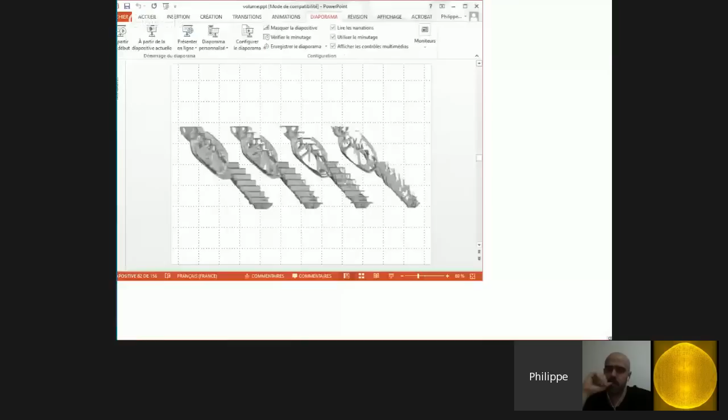Actually, there is a little problem. Sorry, the first screen doesn't work apparently. Sorry, just a small technical issue. Okay, do you see this screen now, because it seems the one before didn't work? Does that one work? It's okay now, Philippe, it's okay.

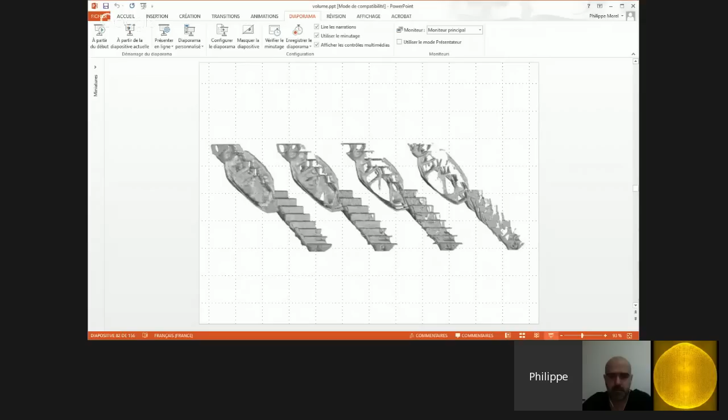It's better? Yeah, we can see the picture of the stairs. So this is a stair produced by topological optimization software by Romain Duballet, who is an engineer who graduated from the École des Ponts. He's also a shareholder and a partner in XtreeE, and is now...

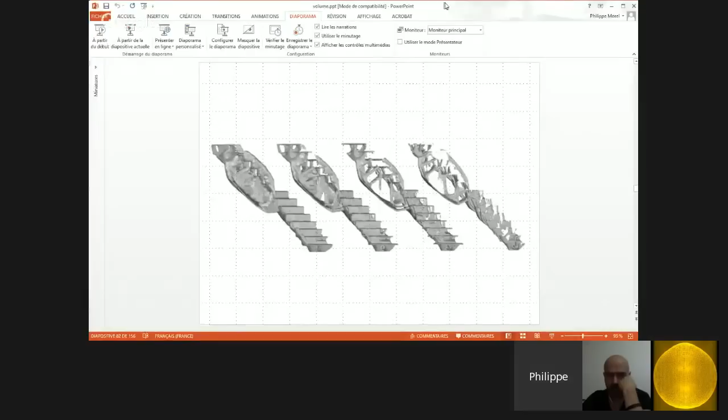I'm sorry, but the problem is you can't use full screen. Okay, just have to, yeah. So I have to stay... Yeah, you have to, I can't use the full screen. Don't worry, okay, it's fine, no problem.

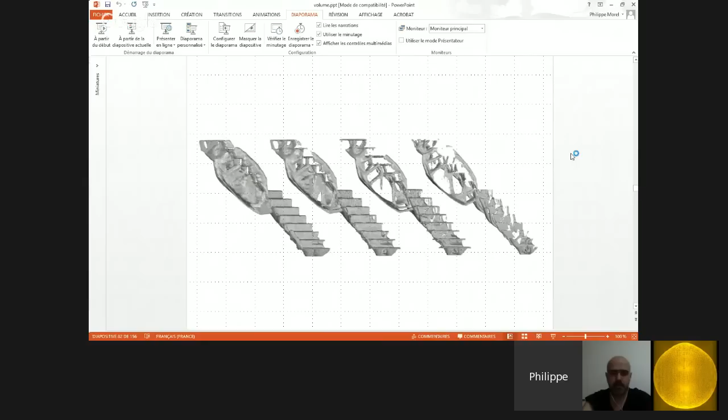This stair produced by Romain, who is also part of XtreeE, is on the engineering side, and is also, by the way, a PhD candidate now at the École des Ponts. As you can see, it creates quite complex shapes. Here are a couple of images of mechanical analysis of this element.

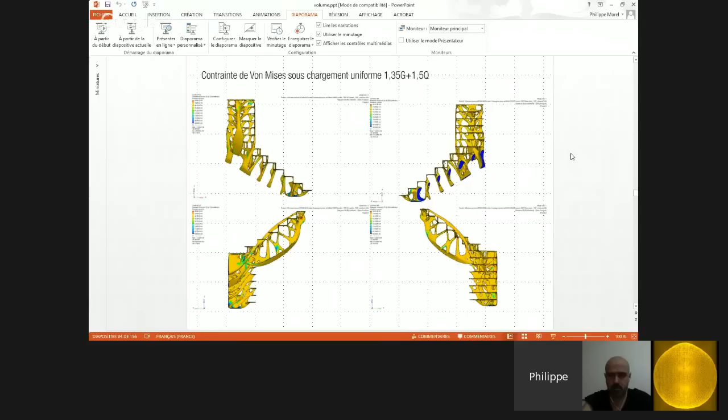But the problem you have is first that the geometry is very dirty, and here I would refer to my friend Peter Macapia, who wrote a very beautiful essay entitled Dirty Geometry, published a couple of years ago. I think it's a very amazing essay in architectural theory.

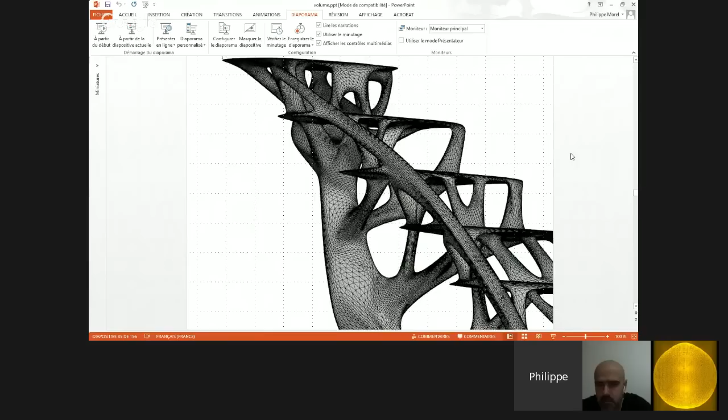First you have to clean up the geometry. The more automated it is, the better, because it takes a long time, and it's a very boring job to do all of this by hand, obviously.

Here is another approach to topological optimization, which is not done by a commercial software, but by a fully programmed algorithm, also programmed by Romain Duballet. He wrote the entire mechanical analysis library, and also the genetic algorithm itself. The whole thing was written in Mathematica.

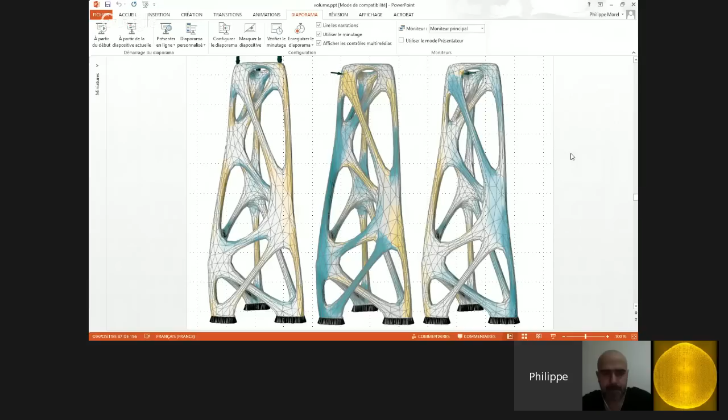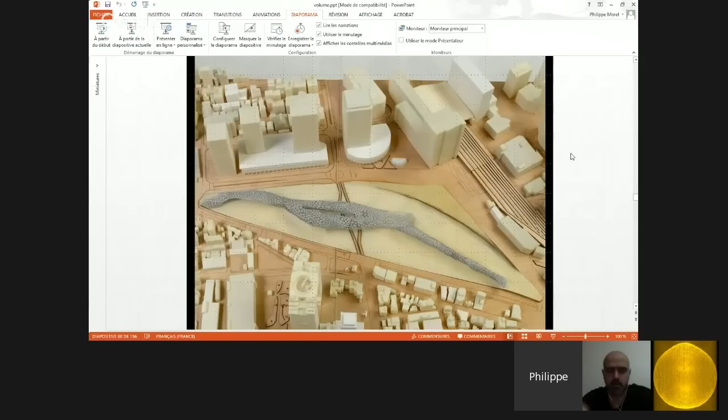I will show you a small piece of that made by our company. Here is a project we made in Japan, a competition we were shortlisted for last year. It was in Osaka, a very nice site, and we proposed a gigantically long building, some sort of a mega structure, more than 1 kilometer long. It was 1.2 kilometers.

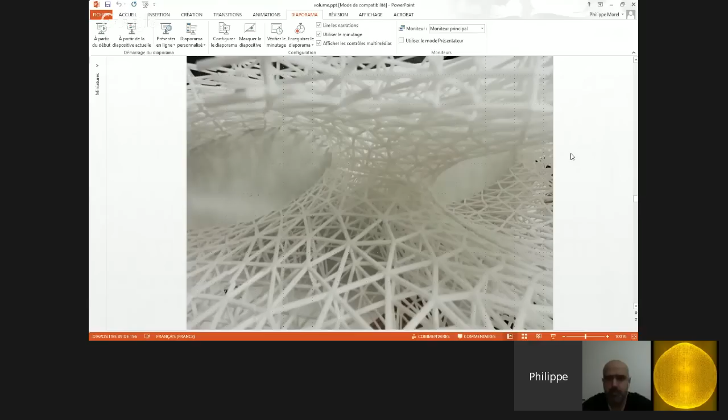It was a super long building, completely made of a space frame, or space truss, or 3D lattice element. We believe this is quite interesting, but it really creates new problems in architecture. If we want to do that in steel, it's not that difficult - we have the technique now to do this in steel.

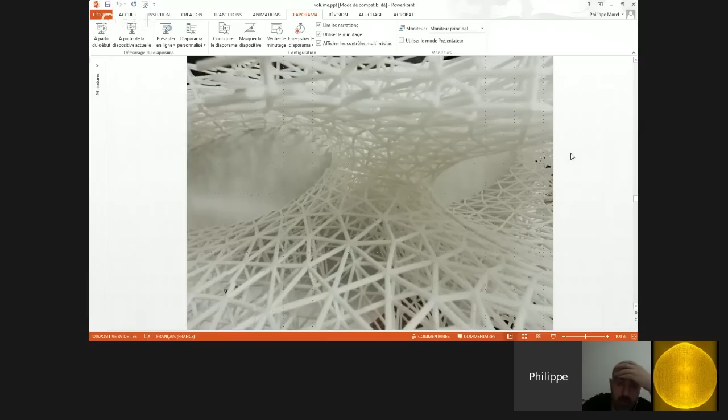But if you want to do this in a continuous way, the way you would do it in small-scale 3D printing, small-scale additive manufacturing, then it becomes a crazy challenge. So I really believe the real challenge at the moment in architecture is to make the intrinsic geometrical and topological complexity associated with topological optimizations buildable.

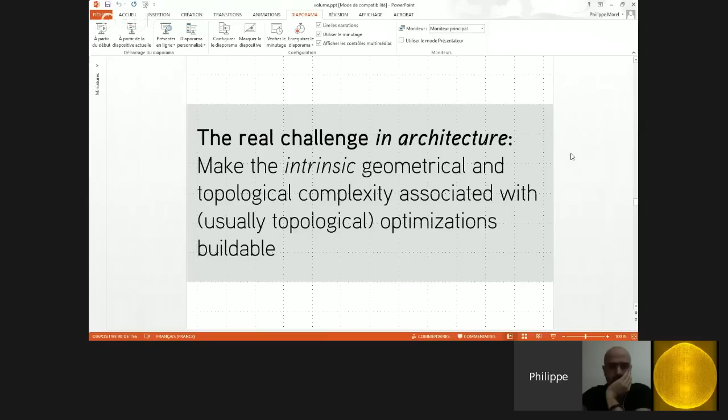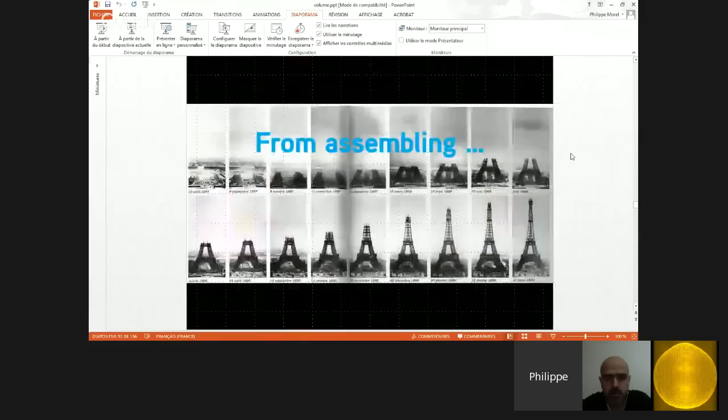It's a fact that 3D printing has the potential to revolutionize the way we make almost everything. This was even said by President Obama two years ago. And we go from assembling to printing, etc. But at the small scale, it's fine, actually.

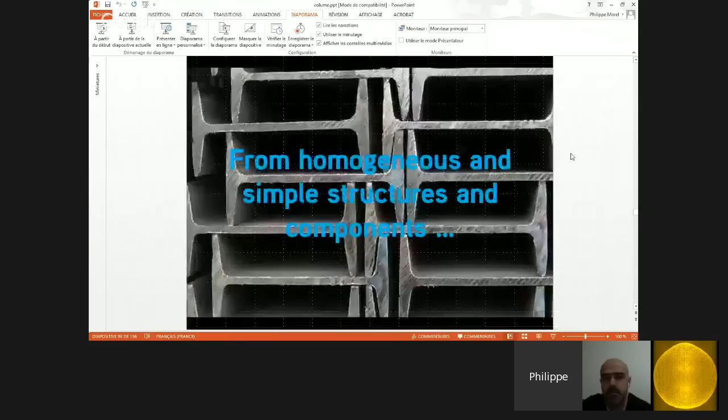These are works done by my office, with Felix. And we also move from homogeneous and simple structures and components to heterogeneous and smart design. This is work done by Minsu Kim, a student of mine when I was leading a research studio at the UCL Bartlett with Thibault Schwartz, two years ago.

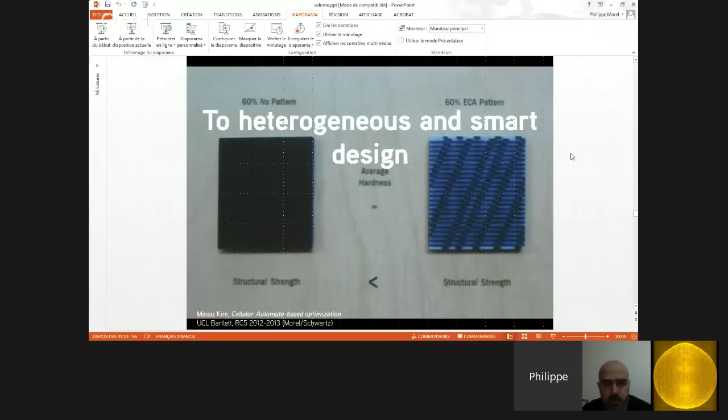These also are old projects from my office, but let's move a bit fast. This is just to give you an idea of where this interest in three-dimensional lattice comes from. In fact, it does not come from an interest in space truss or space frame - on the contrary, it comes from a long-standing interest in voxelized geometry.

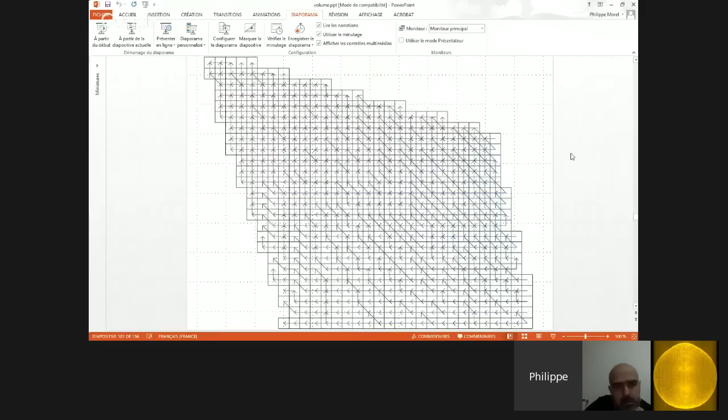As you can see in these images, the principle is quite simple. We were thinking about a way to use voxels as individual cells and to create connectivity rules in order to create cavities inside these cells - hollow cells in order to pour self-placing concrete in those cells.

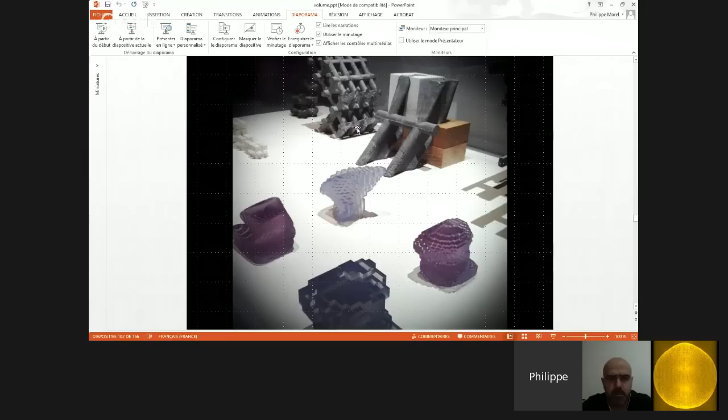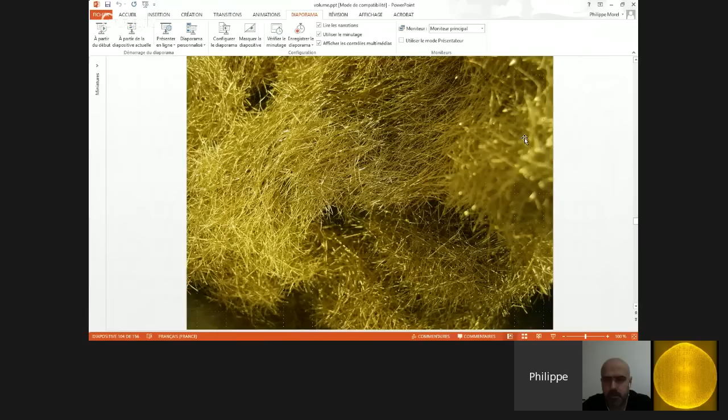If you look at the top here, you clearly see a small piece of concrete which is really three-dimensional, the result of concrete which was poured. It's a fiber reinforced concrete, poured thanks to the help of Lafarge-Holcim, the famous cement manufacturer.

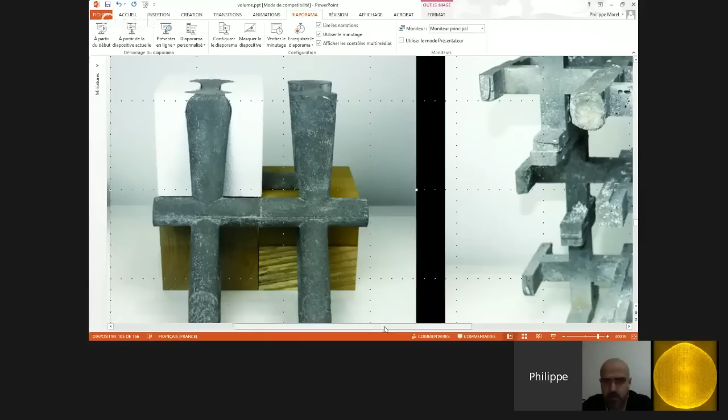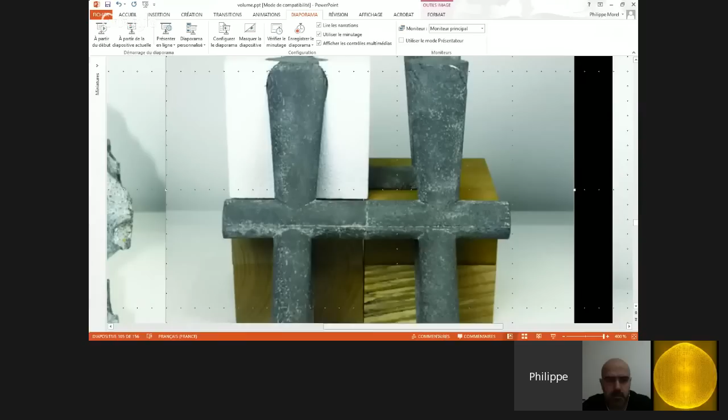Which was poured in these cells. So it's not that beautiful, but conceptually speaking, the interest we have now - and I personally have - in a three-dimensional lattice does not come from classical three-dimensional lattices. It really comes from an interest in voxelized geometry.

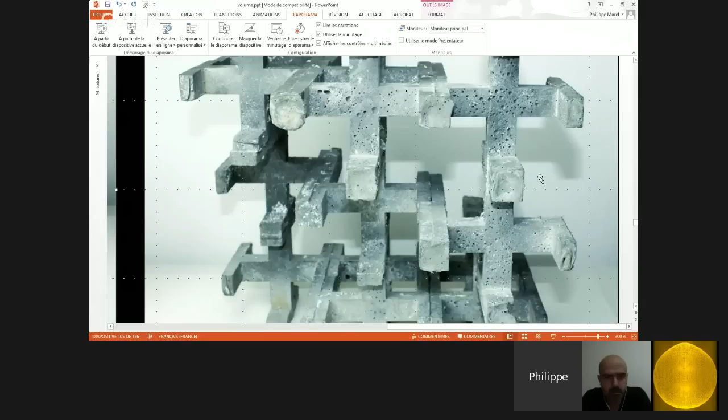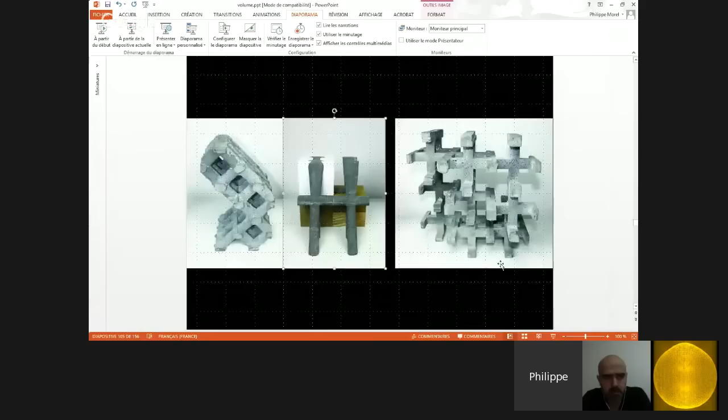I mean, defining connectivity rules between voxels. And if you have pipes which are continuous between different voxels, then you can pour some concrete in, and you can obtain this really amazing three-dimensional concrete component. You can see here something more complex, which we realized at that time with my former interns, Tristan Gobin and Thibault Schwartz, at the office.

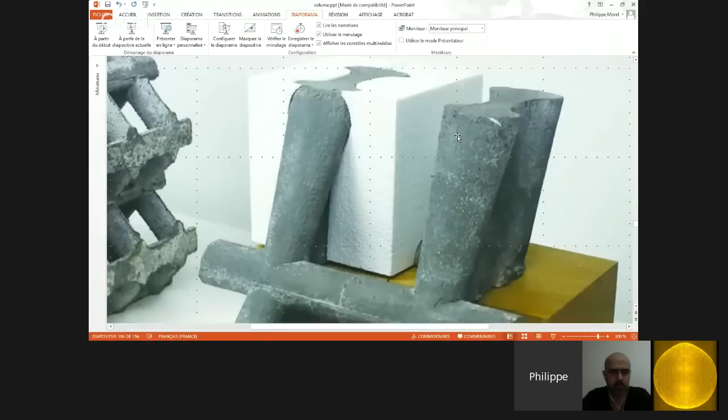With the help of other interns and very talented students, you see here a polystyrene block, which is a voxel. You see the way it's cut, and when you remove this block, you see the kind of geometry you can obtain.

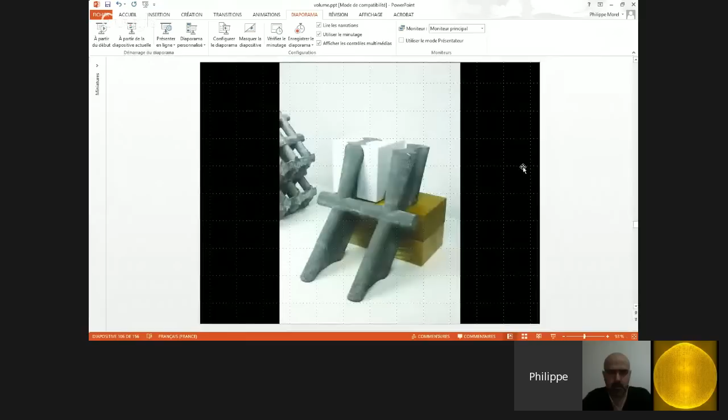I'll go fast with these images, but there are two concepts which are at the root of what we are doing at the moment, and also what I'm trying to do myself with the X3 company. X3 is dedicated to the large-scale 3D printing market, and it's not only about my own specific interest in this kind of geometry, but it answers more global demands coming from various clients.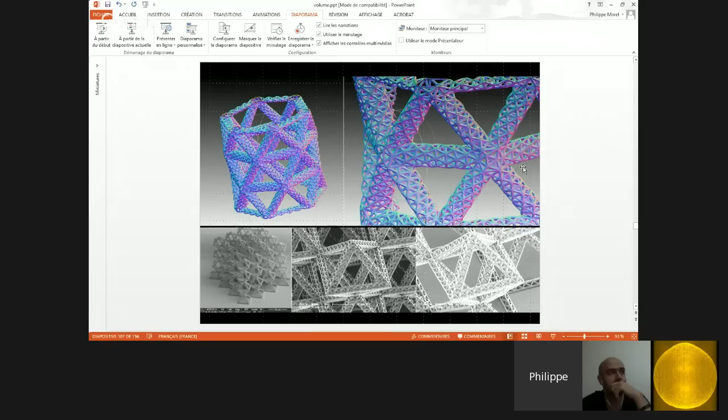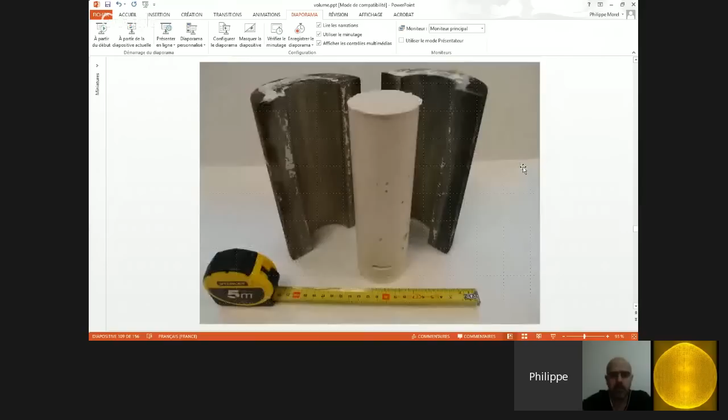We produce many different kinds of products and geometries. You see here the concept of recursivity, which is absolutely crucial. You also see a very old experiment with space frame here.

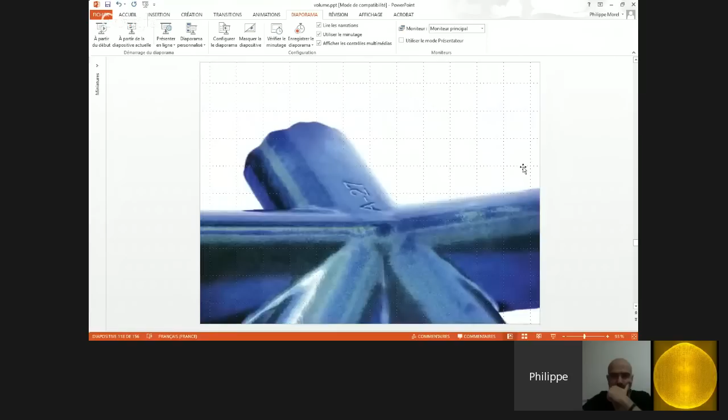This was done with the help of Justin Dirrenberger, associate professor at CNAM and researcher in the PIMM laboratory at ENSAM. At that time it's already two years old. This is research we presented at ArchiLab.

We used voxel jet technology in order to cast concrete in. You see that we obtain quite high quality results with the cement. We are very proud that this piece was presented at the Centre Pompidou.

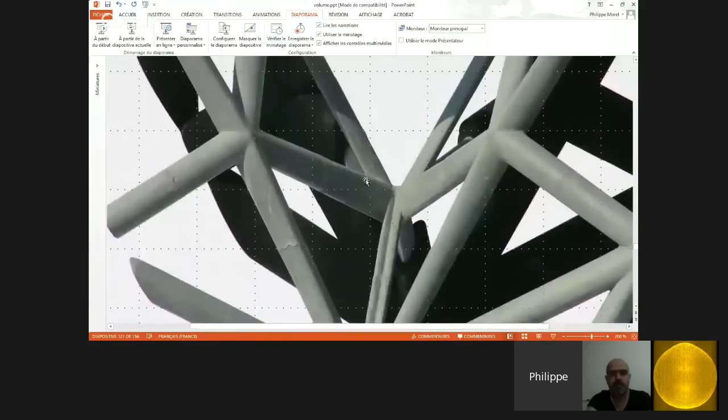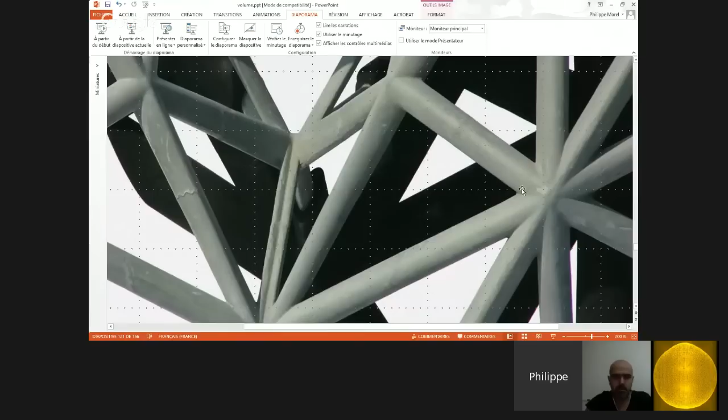It was first presented at the FRAC in the framework of ArchiLab, but also later at the Centre Pompidou, which made it available to a wider audience, and really to a non-specialized audience, which I believe is super important.

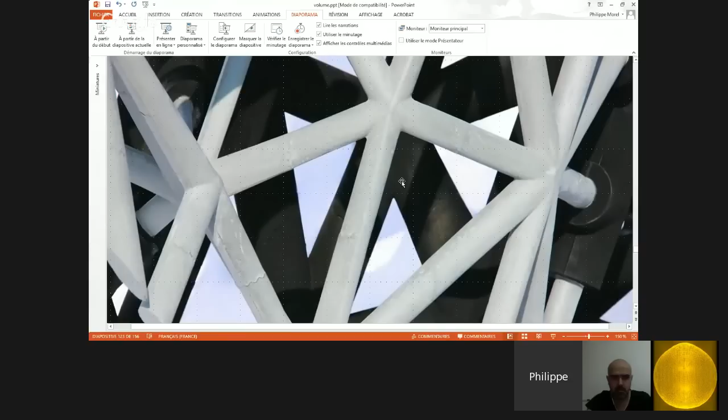You see this kind of very light, extra light concrete lattice. It's probably the very first extra light concrete lattice. The wall element is quite big, about 1.85 meters in diagonal, 65 centimeters deep, and approximately 1.20 meter high. There's only 34 liters of concrete in these structures, which makes it super light.

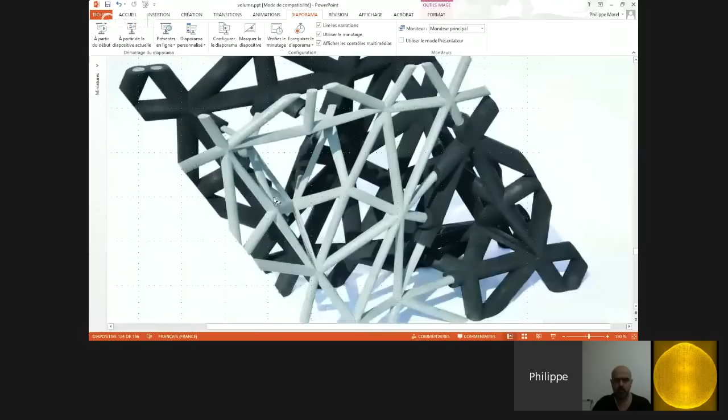Basically it's about 120 kilos. And as you can see, you can obtain extremely beautiful shapes and profiles with this.

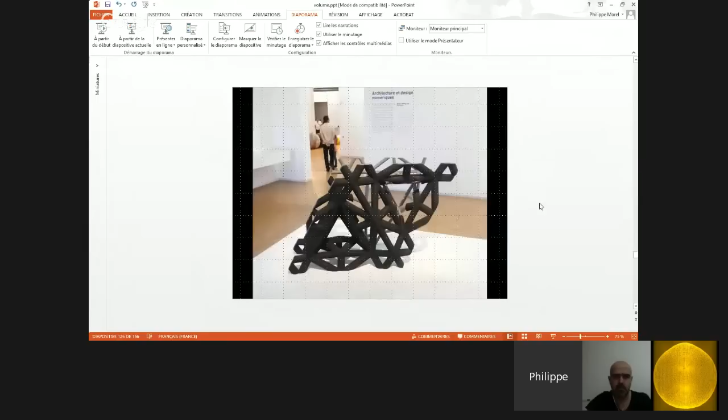So what we are trying to do now with the new company we are creating is to develop this kind of work one step further. I'll pass on to alternative ways of doing this kind of lattices.

This was also done at UCL Bartlett by some of our students with Thibault. And this was done last year by Clément Gosselin, who graduated with me. I was his director of studies.

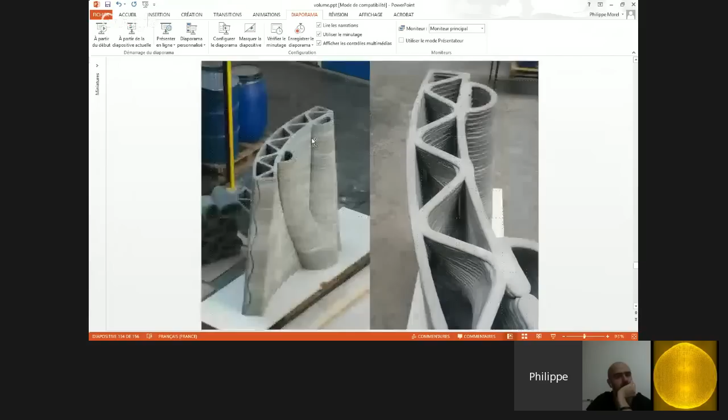I mean his main supervisor. The second supervisor was Jean-Aimé Shu, who is also an architect and engineer, working at Paris-Malaquais, at the École Nationale Supérieure d'Architecture Paris-Malaquais.

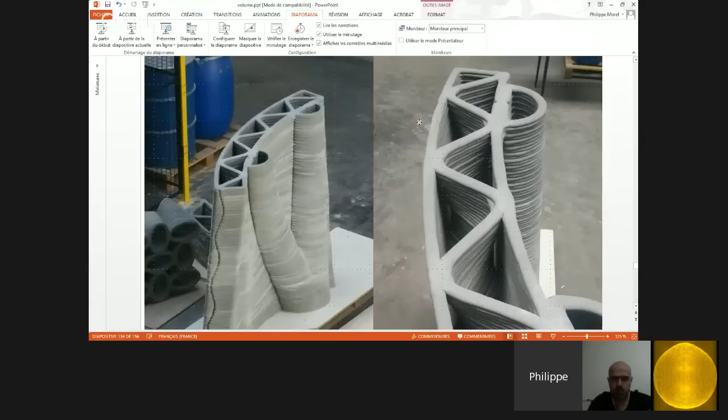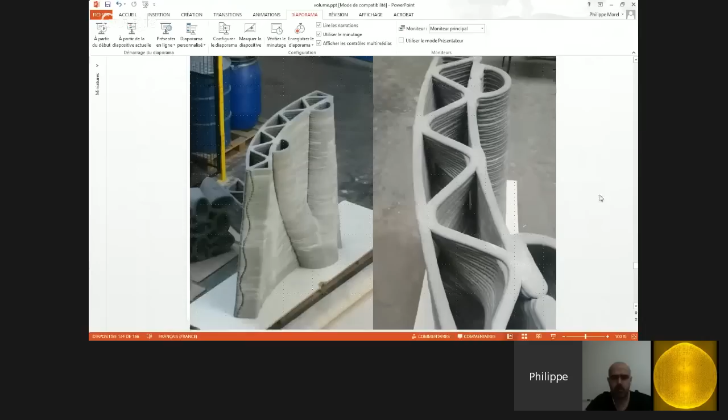This, at some point, was one of the bases of our decision to move, because this was an academic project, and Clément is also a very talented young graduate. He was then a student, obviously. Now he's a young graduate, and we told ourselves, yeah, this has a lot of potential.

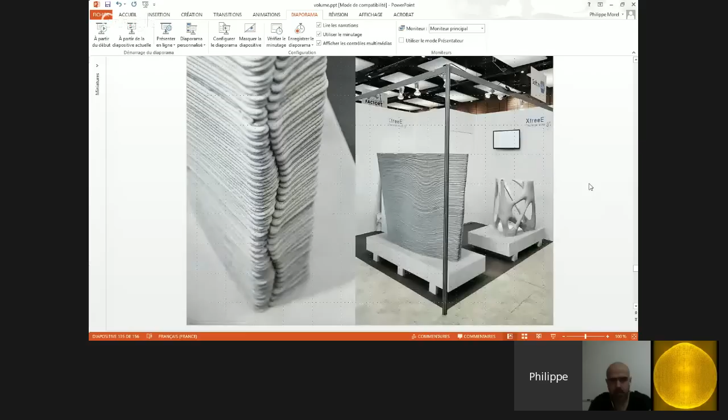Why not try to move this to the next step and create a company entirely dedicated to large-scale 3D printing, allowing us to do this kind of work, but also this kind of work you can see here, for example this three-dimensional lattice in concrete. So we created the company XtreeE.

You can have some information about it just by going on the website, which is simply www.xtreee.com. We are doing consulting, manufacturing, and technologies.

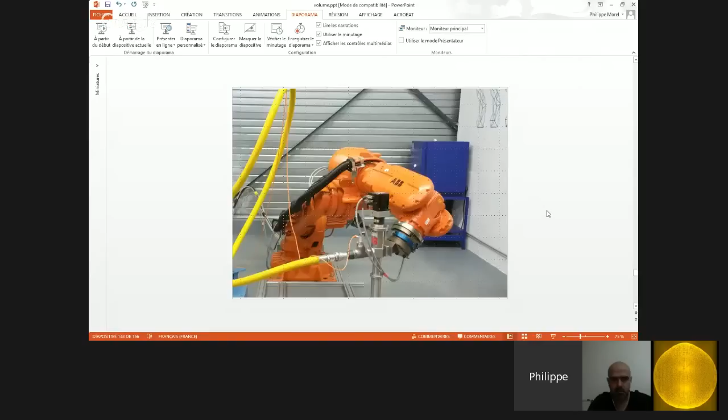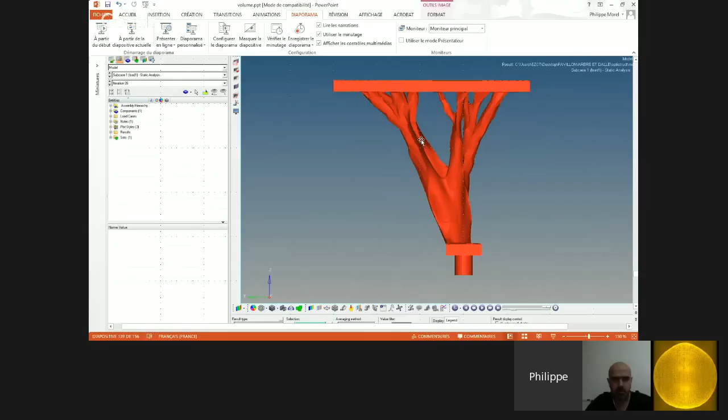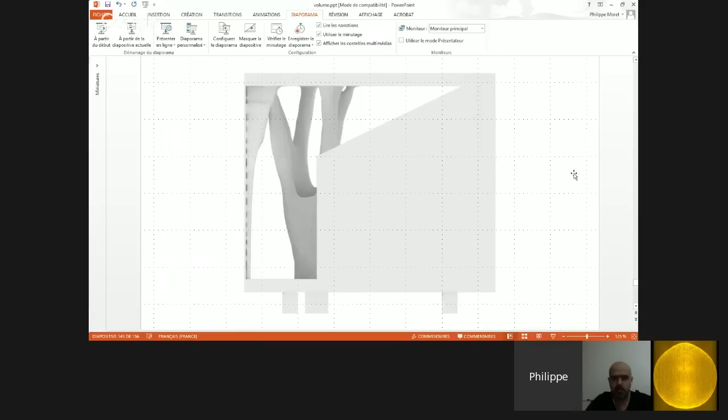It led us to conceive this kind of structure in collaboration with some of our industrial partners, and we really want to build this very soon. So you see the kind of geometries you get.

You obviously see that it's quite tricky. So it's a good test for us because at the moment we are really trying to develop our system in order to make all of this buildable.

Again, I would say doing 3D printing at a small scale is not that much of a challenge anymore, this is what we believe. But making it well at large scale is really, really challenging.

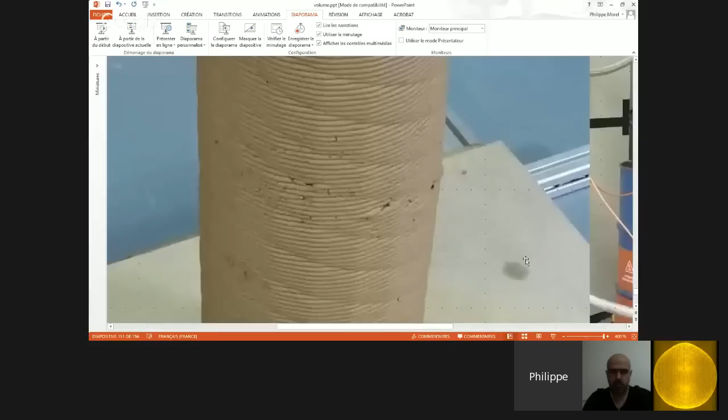So we do molds in clay. You see a piece of mold here in clay. You see a more advanced and more complex one. So we master these techniques really well.

Now we can answer more or less any kind of requirement coming from third parties, architects, engineering offices, or construction companies.

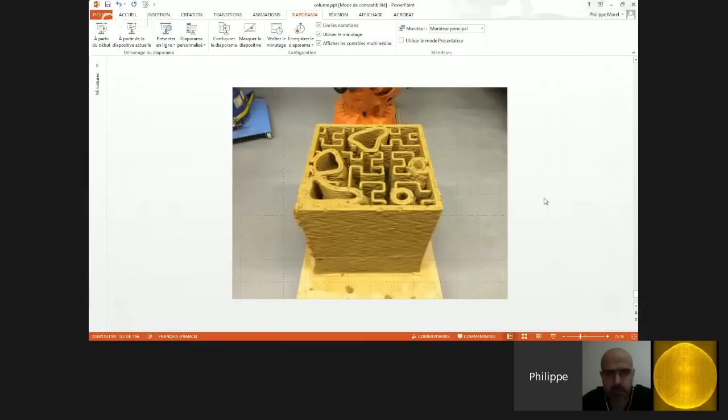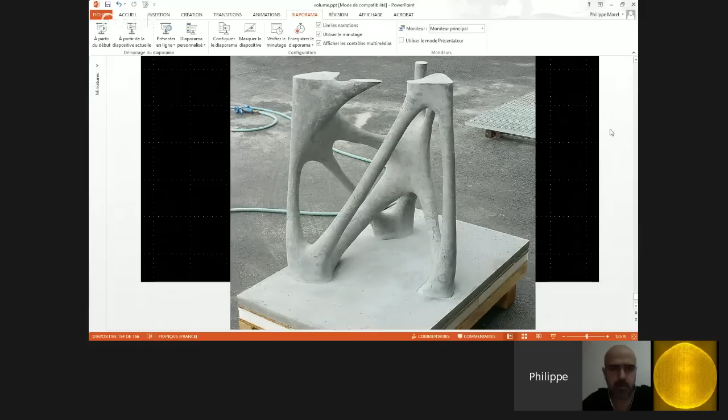But you see the kind of shape and the kind of geometries we can obtain is, I believe, very, very interesting. This is, by the way, a small piece of the three-dimensional structure you have seen at the beginning of this small online lecture. It's cut at more or less 1 meter high, and the full structure was supposed to be, if I remember well, something like 2.50 meters or something like that.

But you see how elegant and beautiful the result can be.